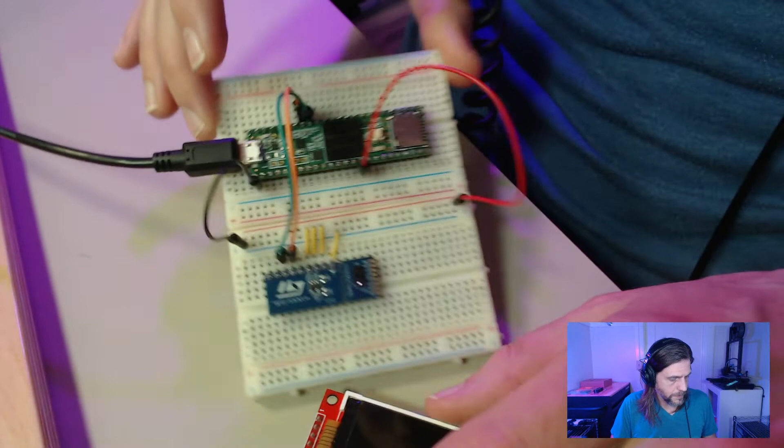Is this blurry? Is it in focus? There's an eyelash on my desk again. My desk is always covered in eyelashes. I didn't move that over enough - why didn't I just move it all the way? Who can say?

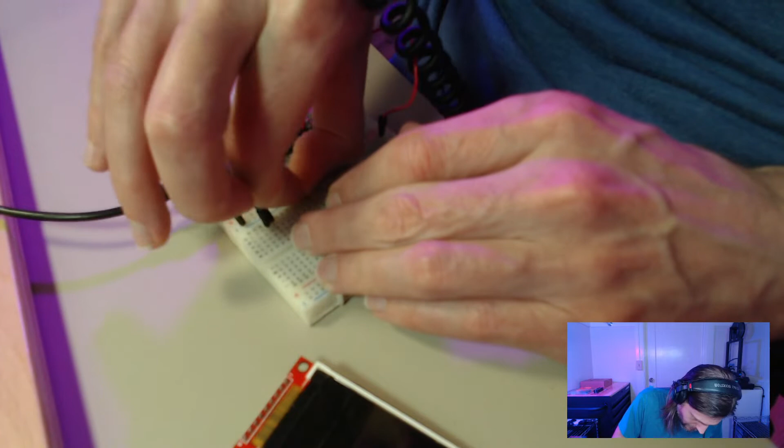Let's just move these over too, and this one, and this one. I should have bent them all up so they don't cooperate.

So we'll just pop this in here, but here's the issue - I don't know any of these.

What are we gonna do about this? I just want it to focus. Just focus. Be nice if I could get this to focus and then take a screenshot so I knew what it said. Can I do it?

Okay, we did it, incredible. So we got the thing, we've got all this stuff. This puts VCC at the bottom and ground at the bottom, so I think we just assume. I forgot if it's supposed to be 3.3 volts or 5 volts. Let's just assume it's 3.3 - that's probably a safe assumption.

Okay, so what did I say? Said pin 1 was VCC. Oh, it's right here on my screen, on my very own screen. Pin 1 VCC, pin 2 ground.

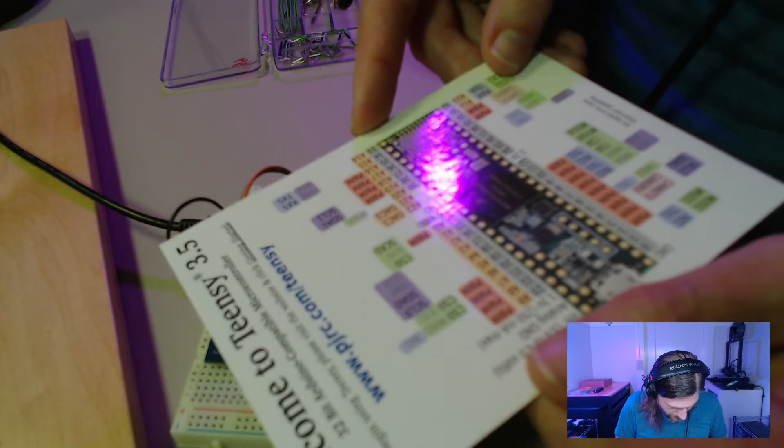Okay, what are the pins that we need to use here? Because I don't know, like, how do we...

So like clock, so cable select 0, cable select 0, cable select 0. How do we have 3 CS zeros? There's some over here too. And MISO 0 and MOSI 0. Why would there be so many CS zeros?

I mean, I guess, does it matter? And there's clock, there's SCK 0.

Wait, say what again? About the toilet? I don't want to talk about the toilet anymore.

Oh yeah, so the sensor, so there's 64 pixels on the screen, right?

And what you're seeing is a bunch of distances. So red means really close. So when my finger's right over, it's red. But as my hand moves away, it kind of shifts through here to orange. The blue is the ceiling, so the blue is especially far away. There's my head.

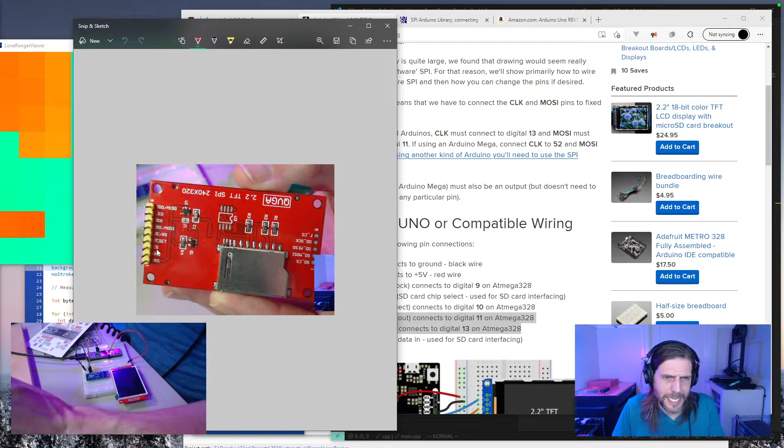But I just have to translate these pins. Like the data clock, does that matter? I don't know if it matters. We're just going to go through and figure out what we have. So we have CS, which is the cable select or chip select. So we'll connect that to select device, to pin 10, I guess.

I think it is probably worth it, if for your very first one, you just don't have to figure out anything weird, and there's not weird nonsense because of a clone or something. I think it is actually best to just start with a real Arduino Uno R3, because most tutorials are going to be about that, so I would say that is the safe place to start.

So we don't care about reset. DC. What is DC? Data clock. I don't understand why there's 4 pins that we need. Just because there already is a clock. Like, what? I don't know. And then, okay.

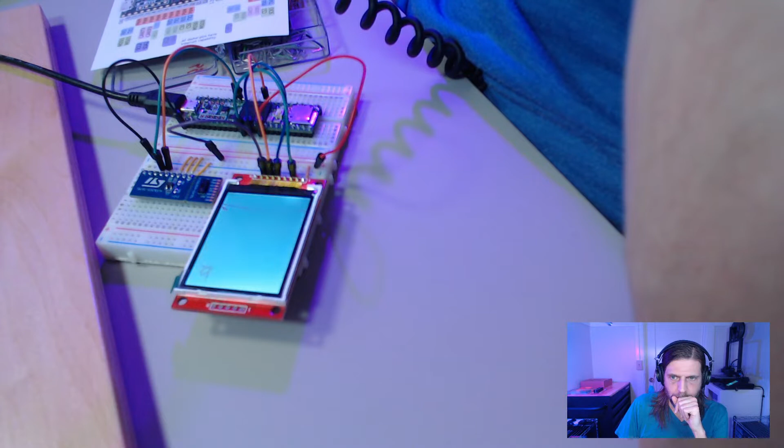It says you need resistors, but there's a bunch of resistors on this board already. Right? It's probably fine, right?

It's a bunch of resistors. Should I wire this through resistors? Am I in trouble for not wiring this through resistors? There's resistors right here on this board. Look at all these resistors. This board's covered in resistors.

Yeah, look at that. Okay, what are we trying to do here? I don't think I've done this correctly because I didn't even hook up all the wires, but let's skip that for just a minute. Oh, we should just do this.

Are you going to be an Arduino hacker? We should just make this easier on ourselves. We should just do...

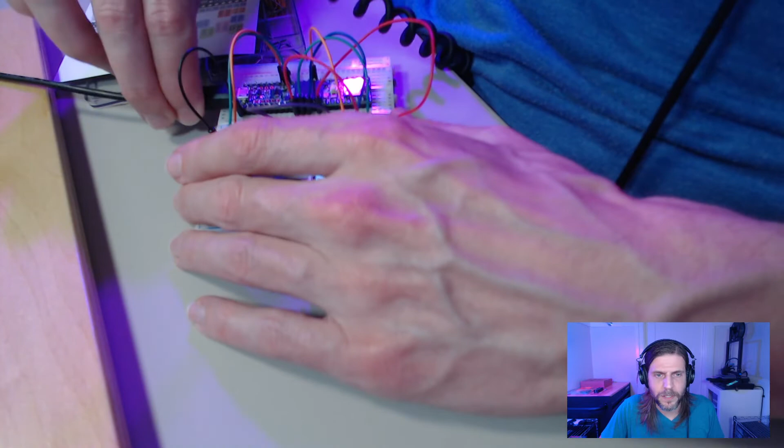Did that actually upload? No.

You do 3D graphics on this tiny screen? Life is Yours was running Doom on his, weren't you? Yours was even a smaller screen, right?

Okay, this appears to be going great. Appears to be going very well. So it looks like we uploaded. No, access is denied. Do this thing instead.

Okay, display power mode. We appear to not be doing well. 4 or 5 pins required to interface. RST is optional. TFTCS, DC. If using the breakout, change the pins as desired.

I mean, it kind of seems like we're not. DC, CS we hooked to the thing that's at SS, pin 10. Our voltage could be too low.

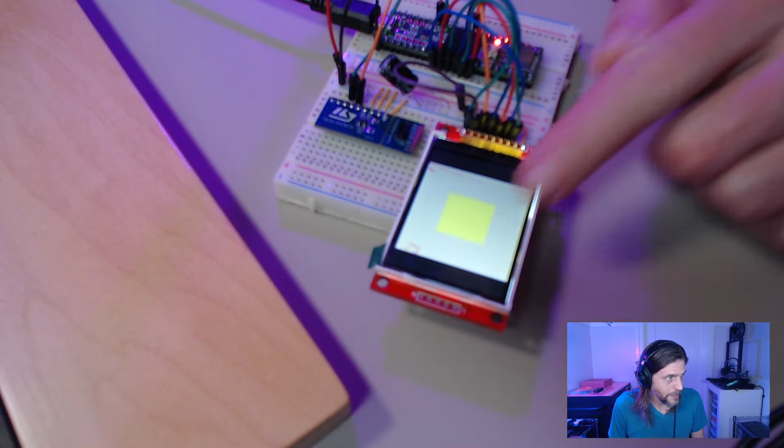Nice of you to just stay focused on that. Doesn't want to. Draclin, what is going on? Are you taking a break from New World? Are you still playing New World? Are you still loving New World?

Did you pick out your house yet? I've been house shopping, because yesterday I got rich, and so obviously I need to house shop. Did you move? You moved? How did it go? I can't believe this, Draclin lives in California, like a movie star. You live in the OC?

I'm actually getting maybe slightly faint. Is PLA fumes toxic? I don't think they are. PLA is less toxic when it comes to creating toxic fumes compared to others. PLA comes out on top in terms of emission of toxic fumes. Wait, is that good or bad? Microfine particles.

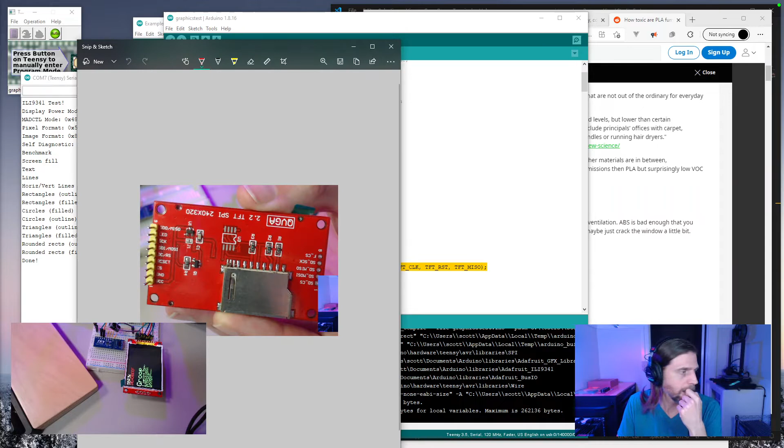Okay, so we need to do what? We need to steal this whole thing. We have to run Visual Teensy again to add the SPI library. So that's a Teensy Arduino library. We want SPI, we want the slow one, we want to save this.

Kind of like this thing, sort of. It's a little weird, it just crashed again. But it's convenient when it's crashed. Maybe it didn't crash, it just moved backwards, maybe that's all that happened. So, you're telling me I can just cram this up here and everything's magically going to work? Is that what you're telling me?

Look at how it alphabetized my includes, so fancy. Squiggles are disabled for this translation unit. It's right here.

Maybe it crashed while it was doing the thing. Come on, Visual Teensy. I mean, I like it in theory. I don't like that it crashes, but when it doesn't crash, I like it.

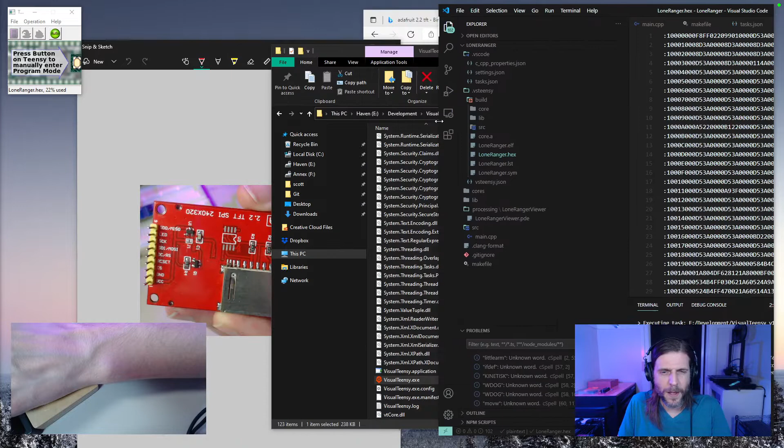Okay, so we're back to Nightmare's Flicker, which I think is just noise because we're not actually drawing anything. So now, what? We want to just do that TFT fill. What was it?

Can't believe Draclin lives in Orange County now. That's part of our balanced breakfast. Man, that's killing me. Okay, so that was, you know.

This is the worst way to navigate through examples. What a terrible design, the graphics library. Graphics test, this is what we were running.

So, like, just fill, for example, if we wanted to make it red. Wasn't there a background? Or just this fill screen, fill it black. So, just in our loop, we just blank the screen every frame.

Is it gonna work? I don't know. Oh my gosh! Life is yours.

Are you gonna visit Draclin and go to Disneyland? Please do, life is yours. When is your grand tour of the U.S.?

What did I forget? Of the US West Coast.

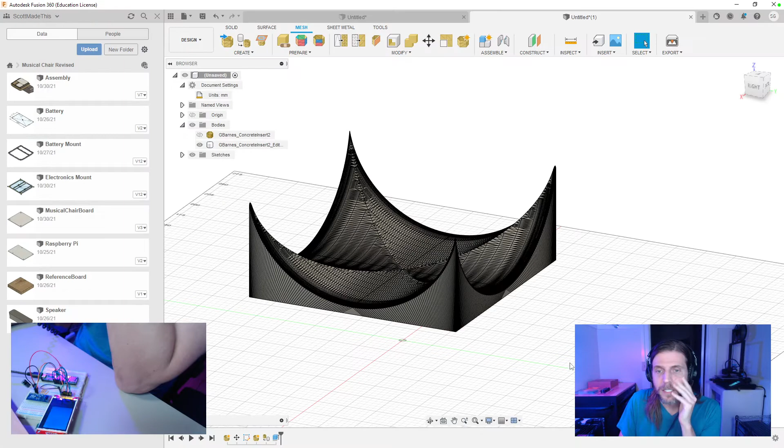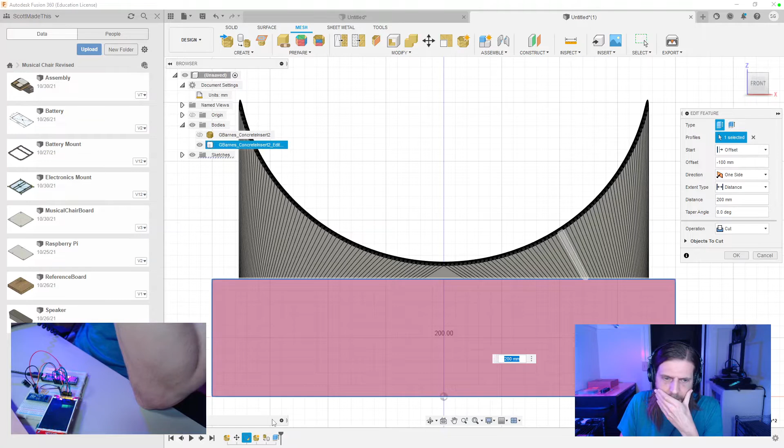If I could get it down to like 12 hours... okay, well let's have a fun diversion. So this was my cutting off—I think we can cut off a little more. Really the height, okay, we want to cancel that.

Edit this sketch. I did not do this the way I should have. In fact, let's just redo this, because I feel like I should not have done it this way. We actually should have drawn the perimeter and then set the height we wanted. So let's delete this. Maybe that just broke the file. Probably broke the file.

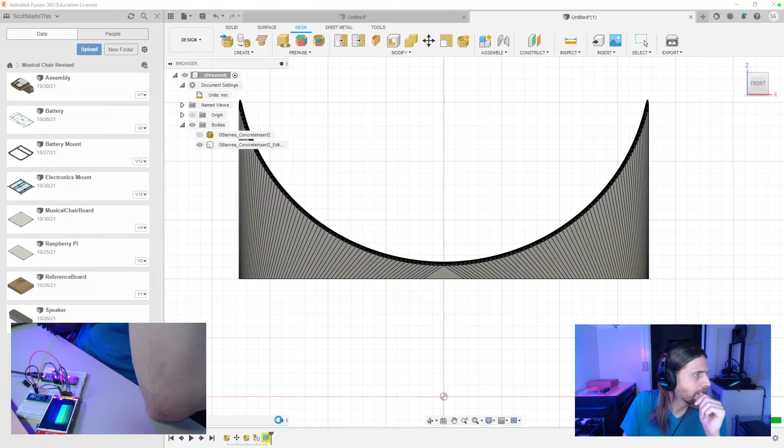Yes, I absolutely want to see your high-tech Wi-Fi antenna mount. Obviously, of course I do.

Well, so you can, I did that thing where you use that crazy casting material that grows, and you can grow things, but then you have to cast that and use the growing material and make a new mold from that. The whole point is to cut down on the number of mold iterations by using these 3D printed negatives, which are fine. The result is good, they're just slow.

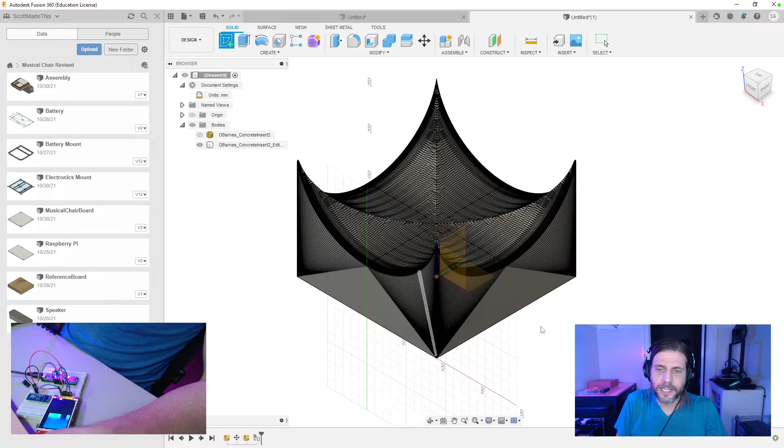So the aim was just to see if I could speed up their 3D print, because that was actually the problem. The 3D print they ended up with, that they're working from, is good—it's very good, it's just slow.

So let's do it with a center rectangle. That's 200 millimeters. Why does that seem so big? Why does that number seem outrageously huge?

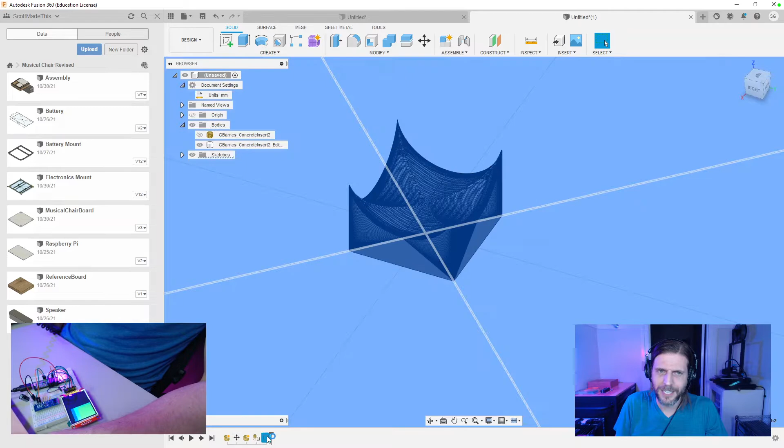What have I done? What? What did I do? What did I do? Very classy. Very nice. Very good look. Did I just do something? I don't understand what I did.

Okay, let's try this again. We want to create a sketch on just this plane, and we want to center a rectangle. Nope, center rectangle.

Just 200—oh, I probably accidentally typed 200 meters. That's probably what I did. Okay, so now we can finish this and extrude it. So I had done 200 before. No, I hadn't, I'd done 50 before. That was too much. It was too much. Stop.

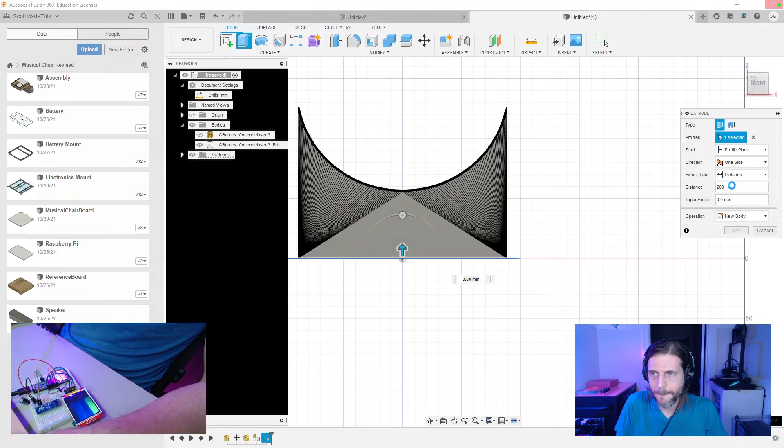Really doing well with... wait, what is—I get 2 links? What's the second link? This should only be 50 millimeters.

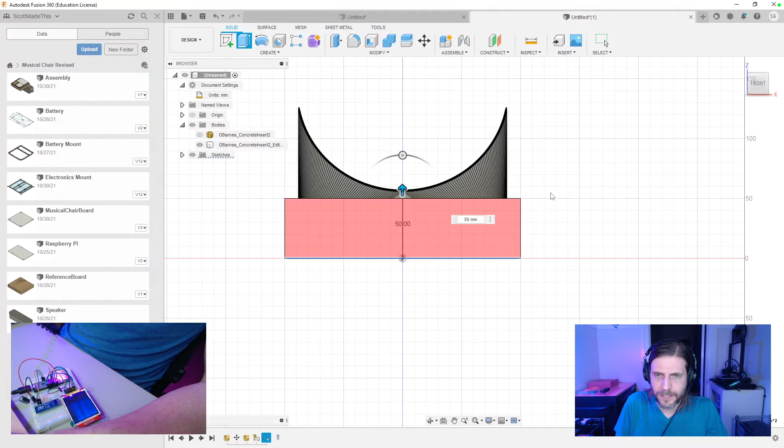Okay, so here's the trick though, because we can go further than that, right? We don't really need any of this. So say it was 55 millimeters—is that too close? I think we just do it.

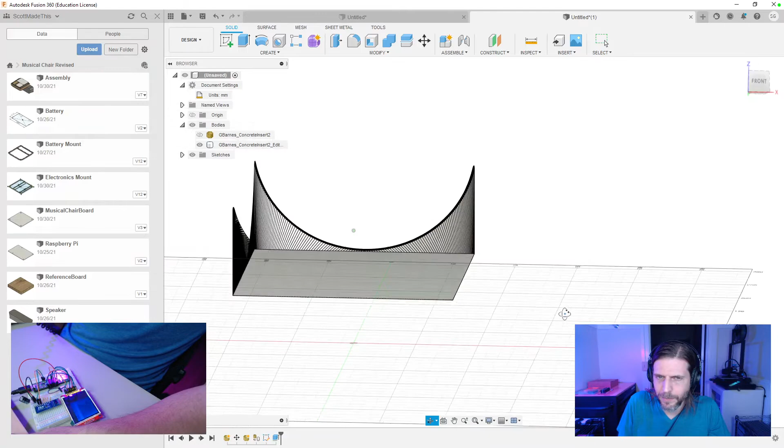Probably really thin there, it's only a millimeter or two, but I think that's good because then I can know very quickly if it's going to fail disastrously. I don't know, man, maybe. Let's try it, and let's try not to be too fancy this time.

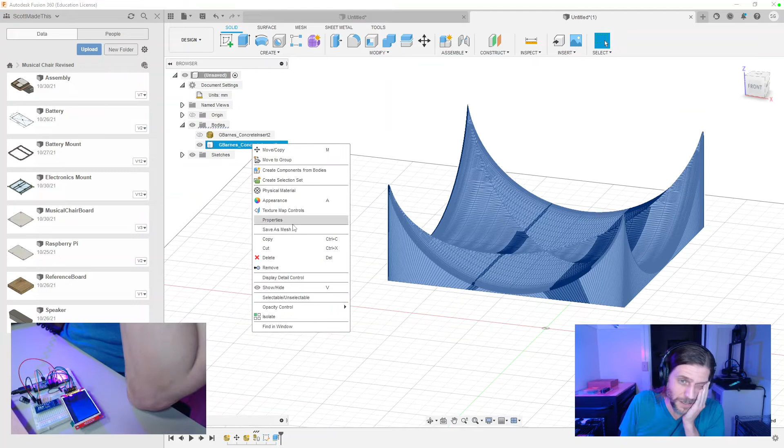So, save it as a mesh. Okay.

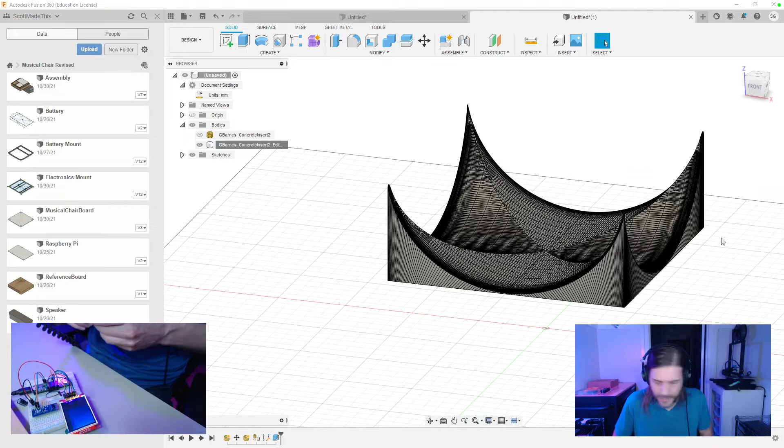Oh, did I mess up the coordinates? But the weird blinking doesn't... it still seems not right. But okay, I believe you that I messed up the coordinates, but it still seems unstable in a weird way.

Okay, go to the slicer. I mean, the numbers that this gives you are all made up anyway. So if we just slice this as is, this was with my weirdo settings.

So let's try standard quality, discard my weird settings. If we just printed this like a normal human would print something, it would be 17 hours. If we didn't print the bottom, it would be 14 hours. If we did this adaptive layer experimental thing, it would be 15 hours. So that actually took it up.

If we went down to 10% infill, this is what worries me though. Let's try this, and I guess let's try adhesion. 11 hours.

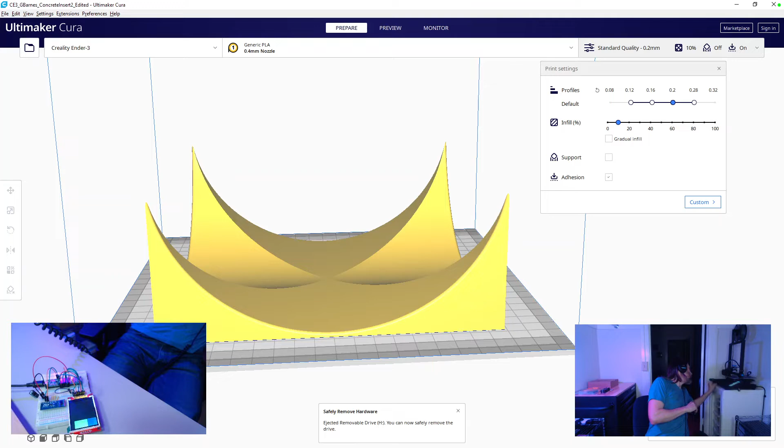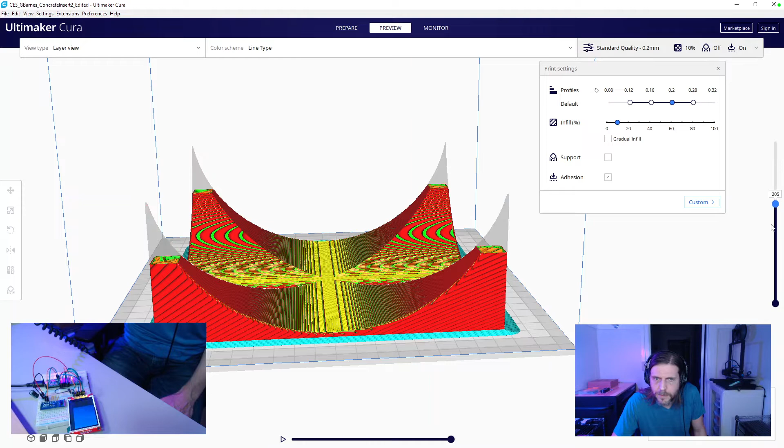And I did a wait. I thought I did a skirt, where's my skirt? Oh, can I not? Wait, I just didn't preview it. Okay, there's my beautiful skirt.

Let's try it, let's try it. Okay, what were we doing? Binary accused me of bad programming, which is a very serious accusation. Okay, I know this looks wrong, but it actually is correct. Width is just the side length, and because it's a square, it is the same.

Kind of doesn't seem right though. Oh! Oh! Oh! Oops. Yeah, you're right, I did it totally wrong. It should be this, and then this. Okay, I did do it completely wrong. You are right. And then these should just be...

Okay, I have to say, Binary's accusations, while shocking and upsetting, were actually correct. How about that? Yeah. Is that better? Maybe that's better. Maybe that's also terrible, it's less wrong.

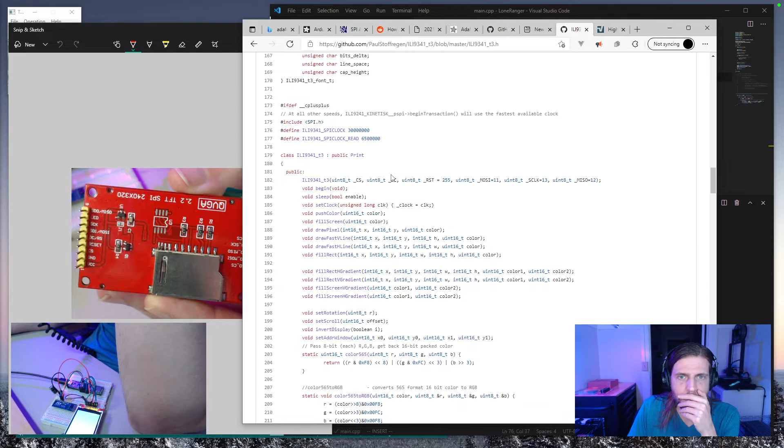So our chip select, we're 9 for DC, 10 for chip select. Oh man. I think the signature is just the same. I don't know what we're doing differently.

Maybe that'll make everybody happy. I don't know. Doodaloo, doodaloo. Where's the doo-doo-doo-doo? We didn't get a doo-doo-doo-doo? Oh yeah, I don't know. Well, these don't, I haven't seen any with this, this device.

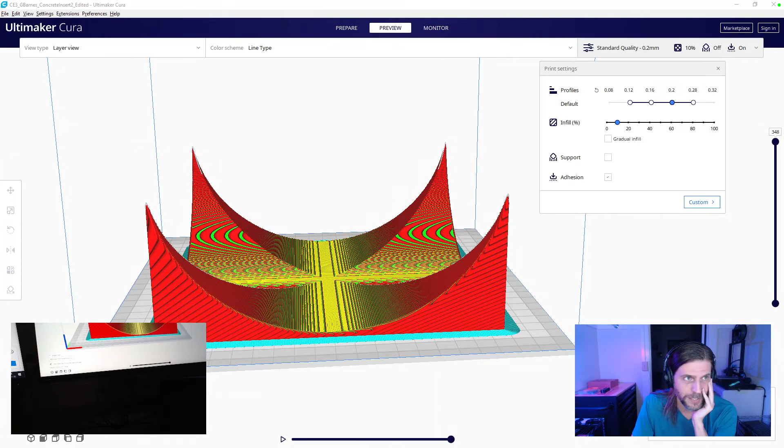Should I just let it go? Do I just let it go, or should I fuss with it some more? So the infill is really a problem, I think. I don't know which one's the more recent one. This one is the latest one. And so that was at 11 hours 56, which is a lie. But at 20% infill, that's 3 hours, but it may just have to.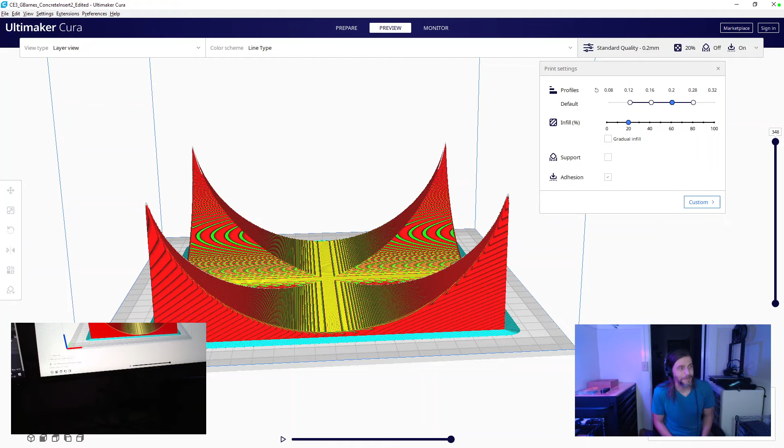Because it really looks like a mess. The previous print, once you get to this spot, you're kind of building this cage, right? Like the infill cage in here, this honeycomb.

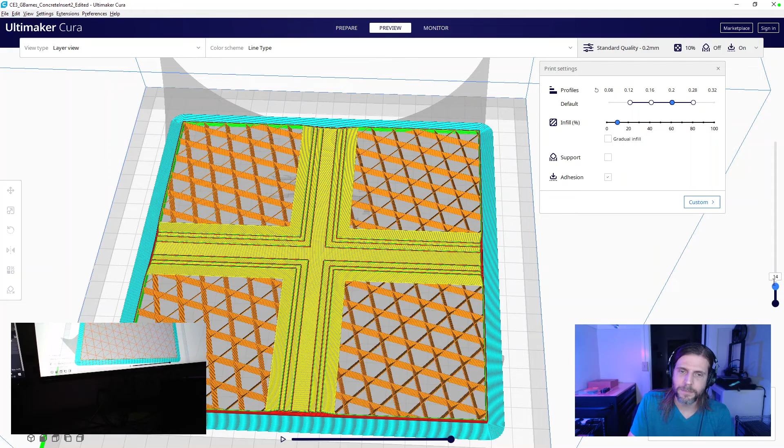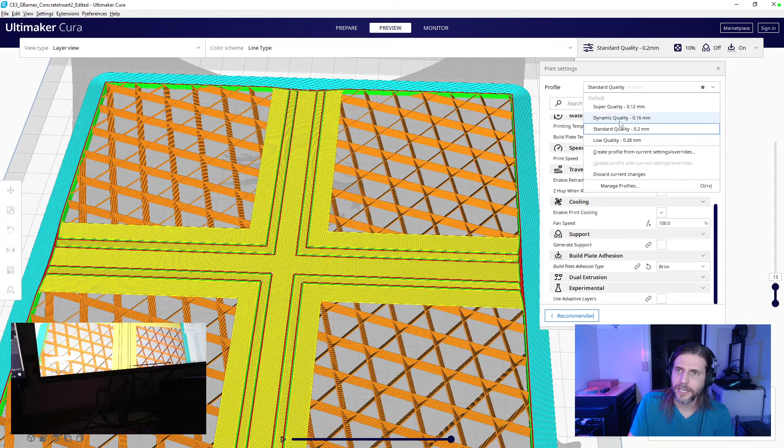When I had it here at 10%, which is what the previous person who had printed the original model printed at 10%, it has to span filament all the way across these big gaps like this, and it's kind of sagging into those nooks and crannies.

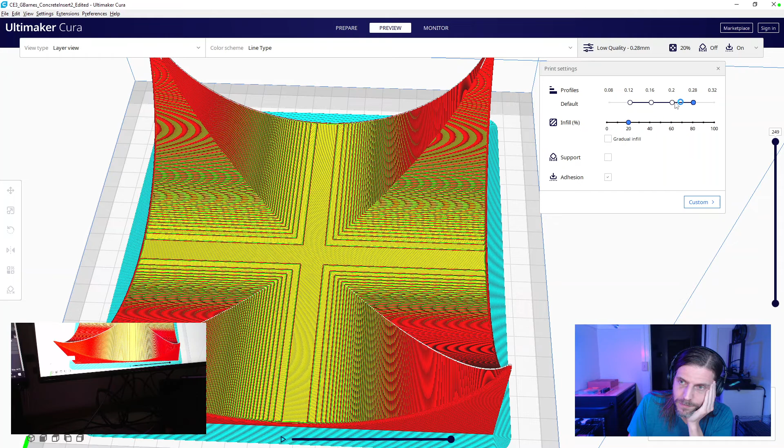So that's 15 hours. Is that going to be too low quality? And if we just didn't print the bottom because we don't care... that's not terrible. Okay, what about this?

Standard quality, don't mess with anything. It's going to be 17 hours. Right? We don't care about the bottom. $14. Man, I was really hoping to do this.

I potentially could, but the gaps are inside the cone part, so even if that would probably take longer to print them individually.

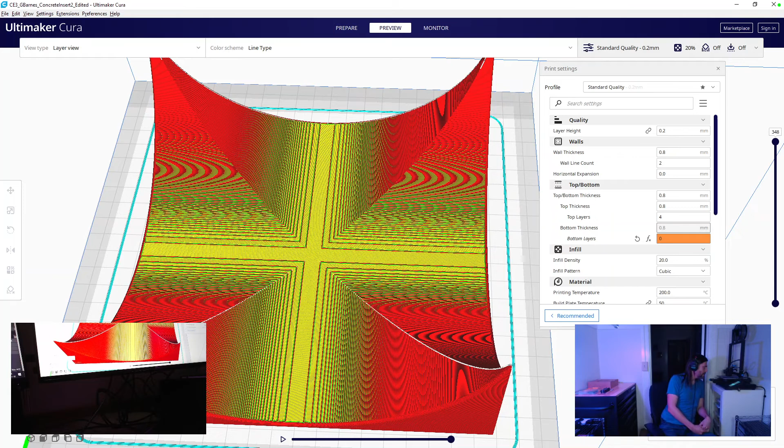I mean, or do I just let it go? I'm an hour in on this, at 10% infill. It's not the worst, but there are some issues.

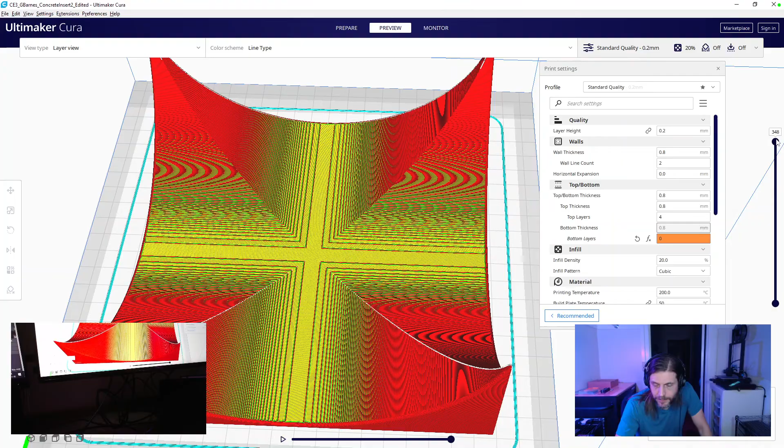I mean, I could also, maybe there's a better infill method. Oh, look at that. Would that be better? Like, look at the resolution of this.

What about zigzag at 10%? Yeah, it's just I'm getting some weird bubbles that have me worried. Like this almost looks like the density of the 20% infill right now. It's just faster. Like this was crazy.

This was 4% infill, and that was not the way to do it. This was 10%, which was going okay until it just started to really chunk out in a place that seemed bad, because if this stuff becomes a nightmare, everything kind of builds on top of this.

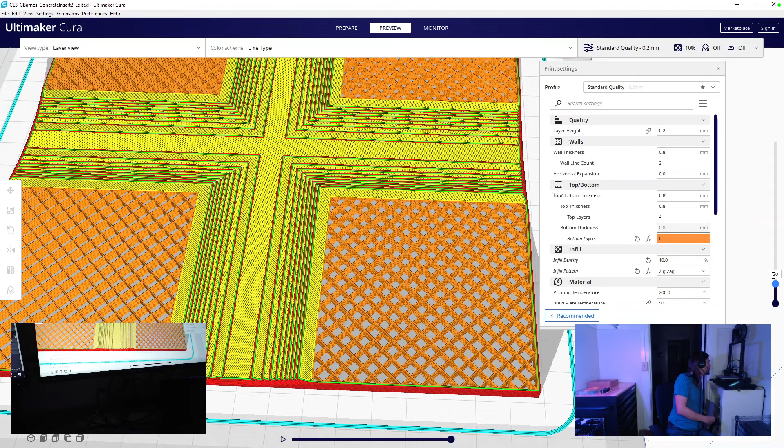Like on the current one, there's just some places that have sort of collapsed inward. This looks denser than this, even though this is only 10% infill - it's just a different pattern. So I was doing cubic, which is not very dense.

So if instead I did zigzag, it looks denser. What does a grid look like? Bad, grid looks not very good. 20% infill. I don't know why. I don't really understand why the zigzag ends up being so much less.

Oh, does it literally just go straight up? Maybe that's fine for this though. I see, it really is just straight up. But maybe that's okay.

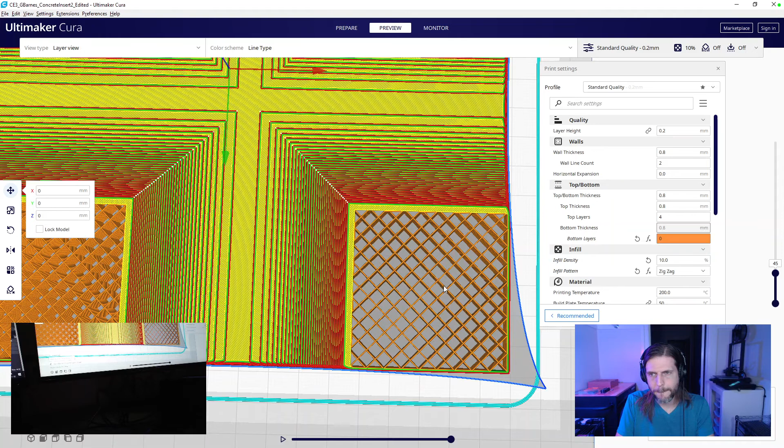I feel like the print I have is going to go south. Yeah, I'm going to stop it. Man.

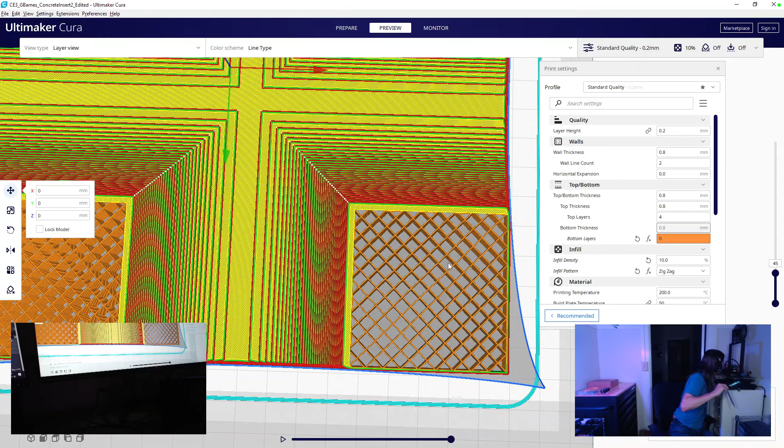So the foundation was fine, but it started to get into the same issue here where it just wasn't spanning these gaps. They're just too much.

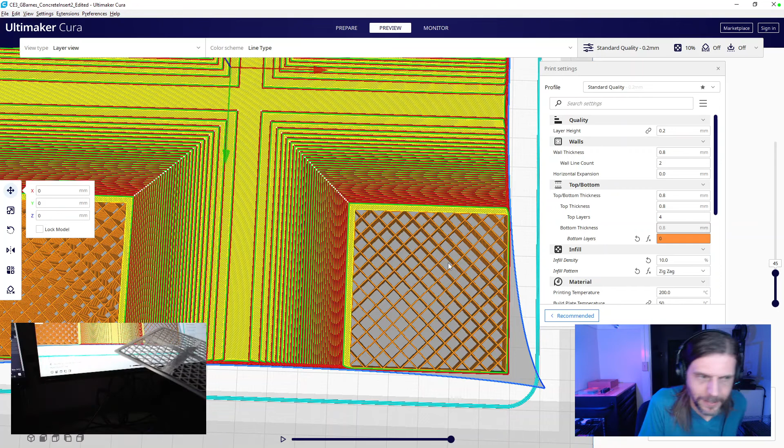And somehow weirdly the grid infill, even though it doesn't look like it would be more supportive - I think for this very particular model, it might be the jam, especially this super dense grid infill like this.

Maybe there's a better option, let's just take a tour of the infills. So we saw grid. Lines looks a lot like zigzag. I don't think I really understood the difference.

I'm gonna be careful, I'm gonna run out of filament for this. So triangles is no. Trihexagon.

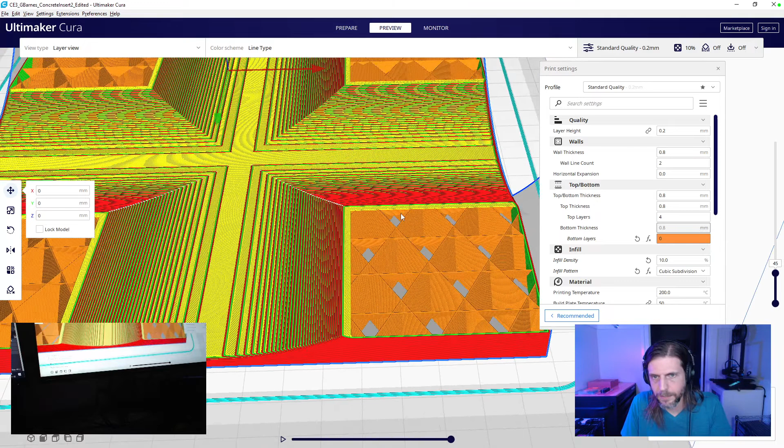Cubic was a no. Maybe cubic subdivision? That looks insane, but seems awful for what we're trying to do. It's like you're trying to run filament right across this, and it just wants to fall into the hole.

So far zigzag seems good. You do get some weird, beautiful things. Look at this, that one's interesting, but you end up with those giant negative spaces. Just don't. For this particular model, those are just terrible. Not good.

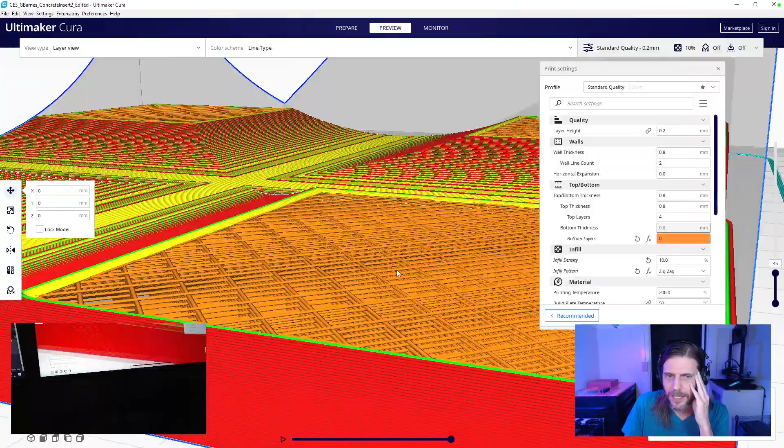I don't think that's interesting. Huh, yeah, I guess it's a good question - is zigzag actually... oh, it's like cross-hatched. Oh, that might be terrible, or it might be great. If zigzag is doing its job and we're able to confidently...

Interesting. Okay, that's why. The problem is, what is keeping this filament from just sagging into this little valley?

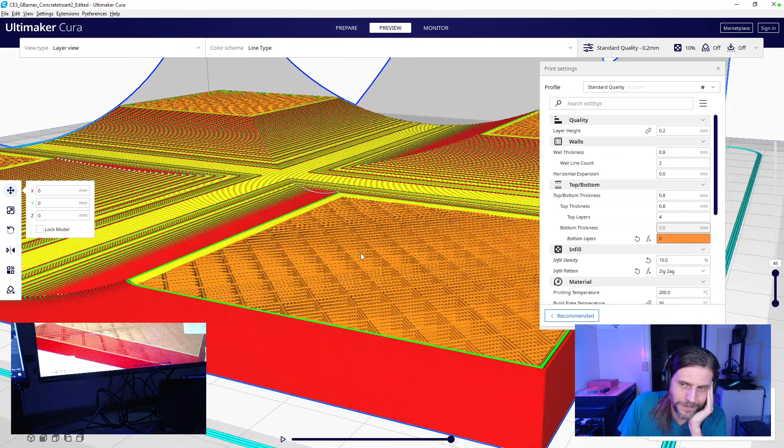Got it, so we thought lines looked like zigzag. Is that doing the same thing? Yeah. I don't think I understand the difference between lines and zigzag. Okay, well that would explain that. Maybe zigzag is horrible for this, because maybe it would just sag as we're trying to build up.

Oops. Shoot, come back. Did I accidentally move the model?

The cross is cool. It doesn't seem good.

It talks about the infill high level, but not about the individual patterns. So yeah, line and zigzag infill swap direction on alternate layers, reducing material cost. Grid, triangle, trihexagon, etc. are fully printed every layer, changing with every layer to provide more equal distribution of strength over each direction. But that's about object strength, I think, and not so much about the thing we want, which is a substrate for these long...

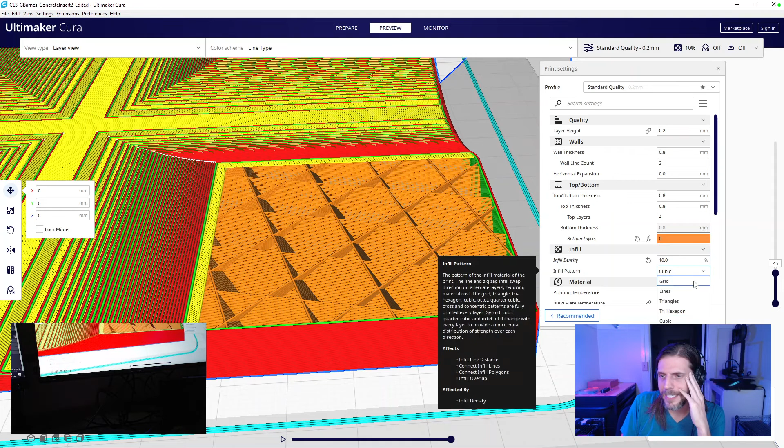So cubic, I believe, is kind of the default, and it was very solid. So zigzag - maybe zigzag is good, or maybe zigzag is terrible.

Well, I don't think you can - it has the vase mode where it basically only prints the skeleton, but I have to have a fill because some of these, once you're going up in the cone, you could try to just always be drawing on the edge of the wall, but that's what was melting inside. Not having some cross substrate support is what was causing it to kind of weirdly melt inside. I think when it had to span these longer areas, it just wasn't sticking.

Print it upside down - I would have to print it with support, like I'd have to print supports on the inside because these would not survive, the printer would just knock them over. I like the idea of it, I don't think it'll actually work, but I do like the idea of it.

So I am kind of feeling zigzag, I must say. So even at 10% infill with zigzag, it's 14 hours. And yes, you have the little material sag in between, but it's so small, it may not matter. I keep moving the model, which is bad.

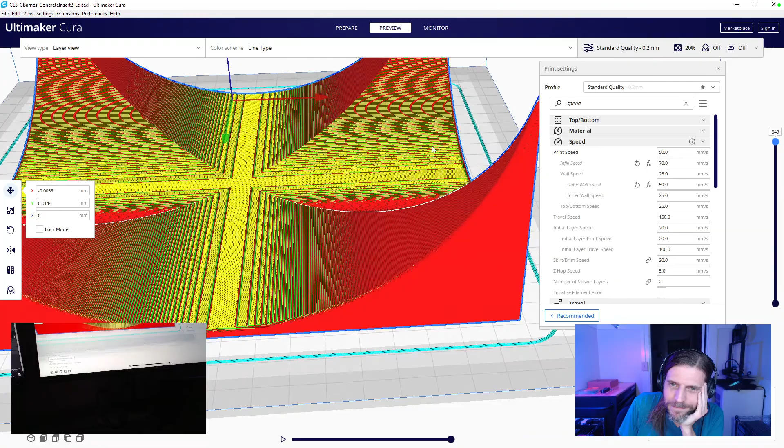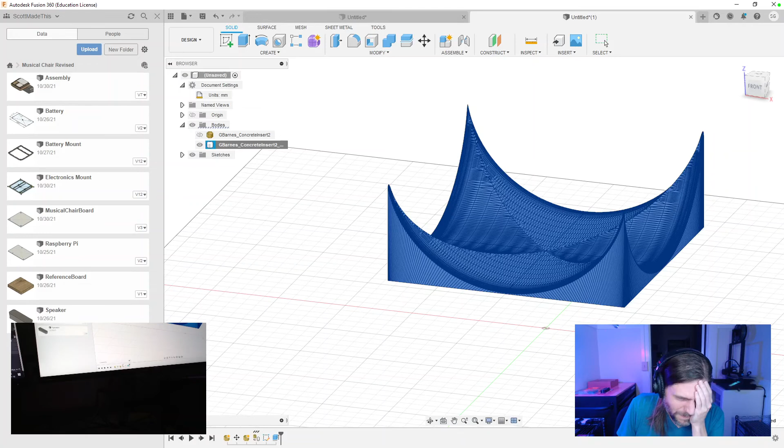I'm also a little worried. Okay, I do want to just send this from Fusion again, just to be sure I didn't mess something up. I just want to start a print and go to bed and wake up and have it be beautiful. Is that so much to ask?

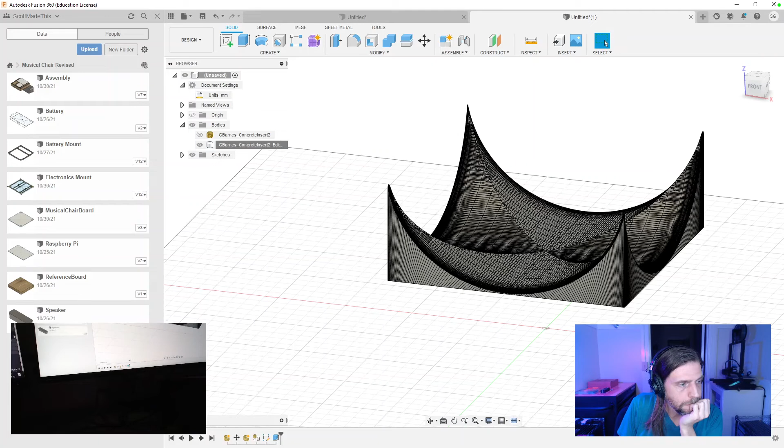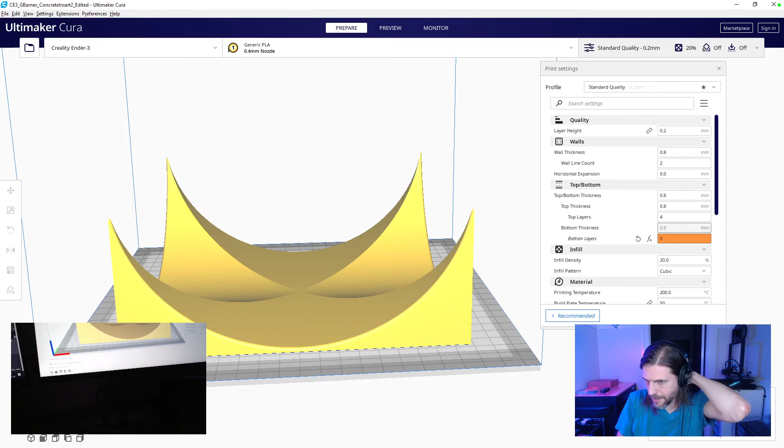Okay, so again, if we were just regular old standard quality, like a bunch of bums, it's like 17 hours. We absolutely do not care about bottom layers at all, so that gets us to like 14, 15? That's 14 hours cubic. And if we don't touch anything else and just go cubic to zigzag, even still at 20% infill, there's not a dramatic change.

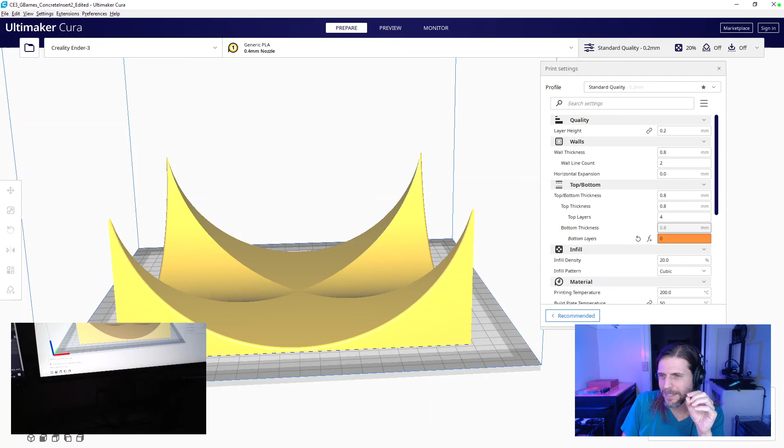But I still think it's better. I still think it might be better, like the density of this... I mean, maybe it's not. Maybe I should just print it at 20% because I've been printing it at 10. I mean, maybe I should just print it at basically all stock settings.

All stock settings except for that bottom layer. I don't know, what's the vote?

Jacqueline, I'm so pleased you stopped by. Missed you, have a lovely night. I really appreciate it. What are we doing, everybody?

It takes an hour to do an experiment and I'm gonna go to bed. So I think I'm just gonna do this pretty conservative thing, but also add... oh sorry, not support. No support, I meant to add adhesion, not support.